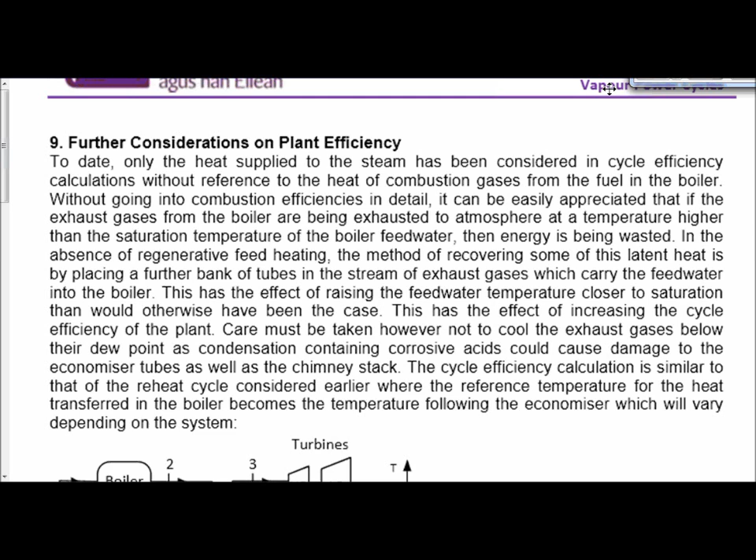And basically they're just a bank of tubes where the feed water leaving the feed pump is fed through before it's fed into the boiler, and they have the effect of raising the temperature of the feed water closer to saturation, so that less energy is needed in the boiler itself in raising the steam up to the required temperature for the turbine. So here is a diagram, both a plant diagram and a temperature enthalpy diagram of a system where an economizer is being used.

It's very similar, obviously, if you look at the diagram, to what we looked at in terms of the reheat cycle. The main difference is in considering the amount of heat that's being transferred into the working fluid in the boiler. Instead of using the enthalpy at exit from the feed pump, i.e. H3 minus H8, when evaluating the amount of heat that's been put into the working fluid up until the superheater, it now becomes H3 minus H9, which is the temperature of the feed water as it leaves the bank of economizer tubes. And that has the effect of increasing again slightly the thermal efficiency.

Looking at the TS diagram, the layout is almost identical to that of the reheat cycle we looked at in the last section, with the exception that point 9 now appears. Now, I haven't located it on the line, but it's going to be somewhere slightly below saturation point here. It really depends on the system. And so that is really the only difference between this and what we looked at before in the reheat cycle.

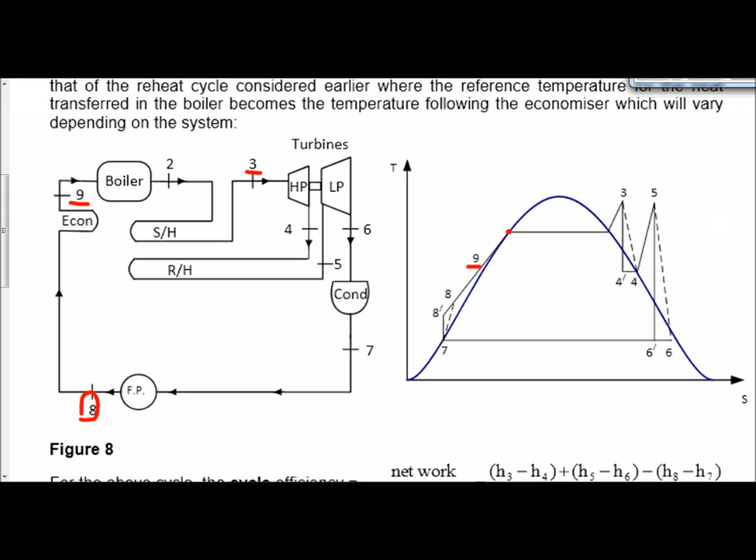So looking at the equation for the cycle efficiency, as before, it's the net work over the heat received, where the net work again is the work done by both stages of turbines, high pressure and low pressure. So we have H3 minus H4 plus H5 minus H6 minus the work input to the feed pump, which is H8 minus H7, and then the heat received is now going to be H3 minus H9, whereas before it would have been H8, plus the heat received in the reheater tubes, which is H5 minus H4. So there's our equation now for the cycle efficiency, where an economizer has been employed.

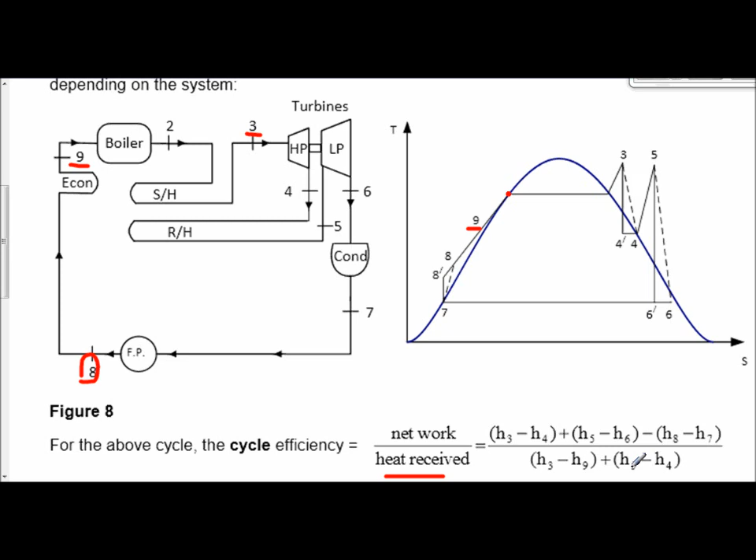I've also listed here on this page the equation for the actual plant efficiency. Now, cycle efficiency and plant efficiency are two different things. Cycle efficiency simply looks at the amount of heat energy that's been added to the working fluid, the proportion of that which has been converted into useful work output. The plant efficiency, however, looks at something slightly different. It looks at the proportion of the energy that's available in the fuel that has been converted into and translated into the working fluid.

And the way to evaluate the energy in the fuel is that equation there, where we have mass flow rate of fuel, so m dot f times CV, where CV is the calorific value of the fuel. So that times the mass flow rate of the fuel will give us the amount of energy that's available from the fuel being combusted in the boiler.

The net work, or in terms of power, because we've included mass flow rate on the bottom, then we need to do the same on the top, so it's going to be the mass flow rate of the steam times the enthalpy drops in both the superheat, up to the point at exit from the superheat section of the boiler, plus the heat received in the reheat section.

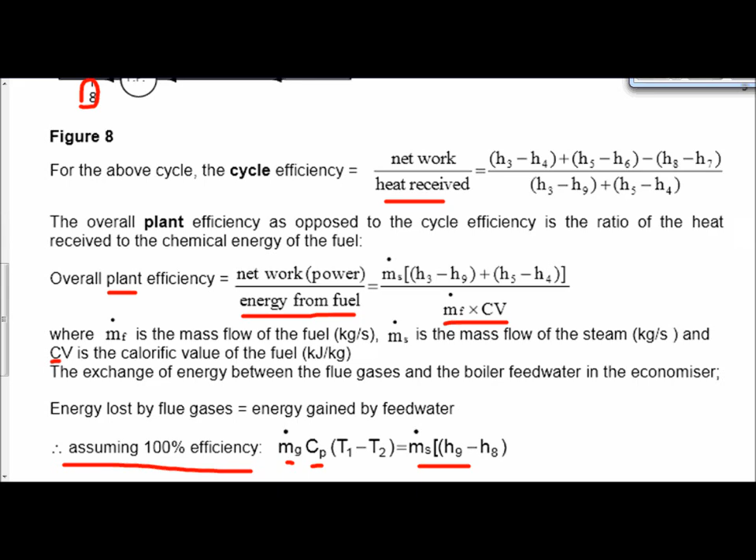And that's then equal to the mass flow rate of the steam times the enthalpy change across the economizer. So that gives us an expression of the energy transferred in the economizer. And at the top of the next page, it just reminds us of what the terms mean in our mc delta T equation.

So if you consider an example where an economizer is being employed to raise the temperature of the feed water, then example 3 on page 19 says a steam boiler supplies steam at 80 bar 500 degrees Celsius to a two-stage turbine. The steam is expanded first of all in the high pressure turbine to a pressure of 4 bar. It's then reheated to the original temperature of 500 degrees Celsius in a bank of reheater tubes. The steam is then expanded in our second stage in a low pressure turbine down to a condenser pressure of 0.035 bar. And we're given some specification of the system.

We have the isentropic efficiency of the two turbine stages. Now you'll notice they're different this time. High pressure turbine is 0.89 and the low pressure turbine is 0.92. The mass flow rate of the fuel is 4,300 kilograms per hour, and the calorific value of the fuel is 42.5 megajoules per kilogram. We're also given the mass flow rate of the steam, which is 50,000 kilograms per hour, and we're told that the feed water temperature at exit from the economizer, which is going to be T9, is 130 degrees Celsius.

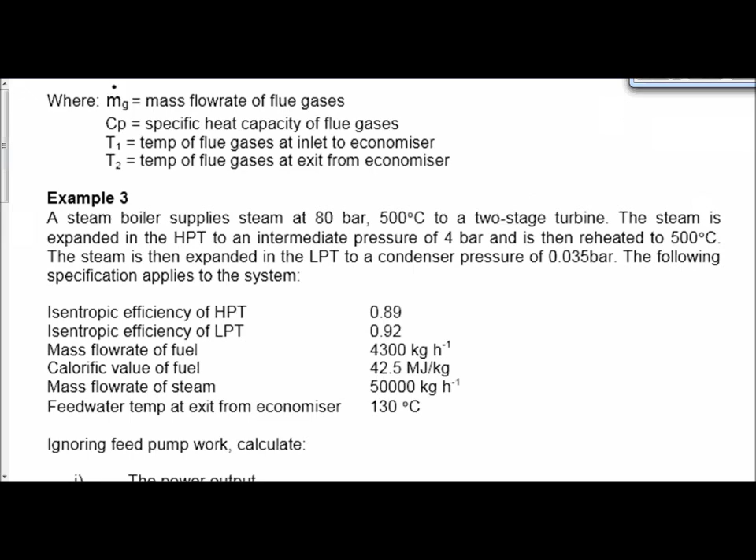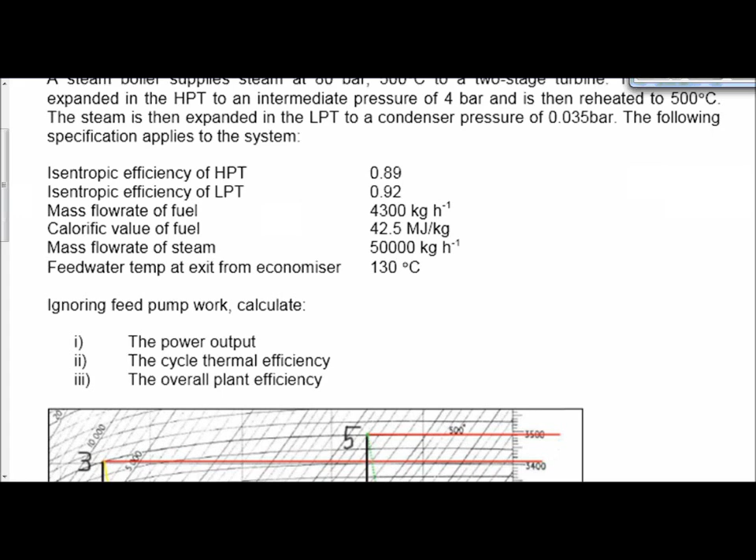So ignoring the feed pump work, then we're asked to calculate 1, the power output, 2, the cycle thermal efficiency, and 3, the overall plant efficiency. So going to our entropy chart, we can plot the expansion through both the high pressure and the low pressure turbines. So again, with reference to the diagram in figure 8, using the same number notation, then point 3 represents the input to the high pressure turbine.

If we draw our vertical line for isentropic expansion, we're told that the intermediate pressure was 4 bar. So first of all, point 3, we were told, was 80 bar and 500 degrees Celsius, which is equivalent to 8,000 kilonewtons per meter squared. So we have 5, 6, 7, 8, and we also have a temperature of 500 degrees. So when these two intersect, then this is our start point at entry to the high pressure turbine.

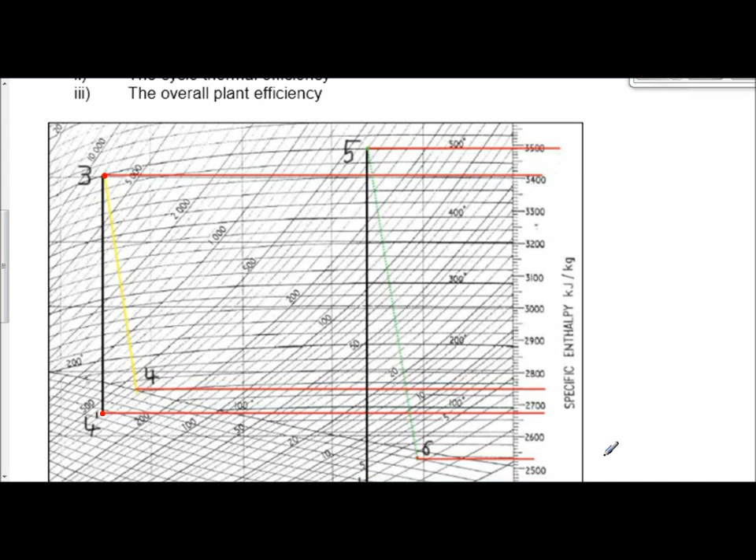So if we draw a vertical line until we hit our intermediate pressure of 4 bar, which again is equivalent to 400 on the chart here, then we get 4 dash. That is the ideal condition at exit from the high pressure turbine. Project across to our enthalpy scale, and we have H3 and H4 dash. If we then look at the expansion through the low pressure turbine, then we were told that at 4 bar the temperature was raised back up again to 500 degrees Celsius. So where these two lines intersect, 500 degrees and 4 bar, is our input to the low pressure turbine.

If we draw a vertical line down to the condenser pressure, which we're told was 0.035 bar, which is equivalent to 3.5 on our chart here, we now have the ideal condition at exit from the low pressure turbine. Again, project across from 5 and 6 dash. We're now in a position to be able to evaluate the actual enthalpy at exit from both the high pressure and the low pressure turbines by employing our equations for isentropic efficiency, like we did in previous examples.

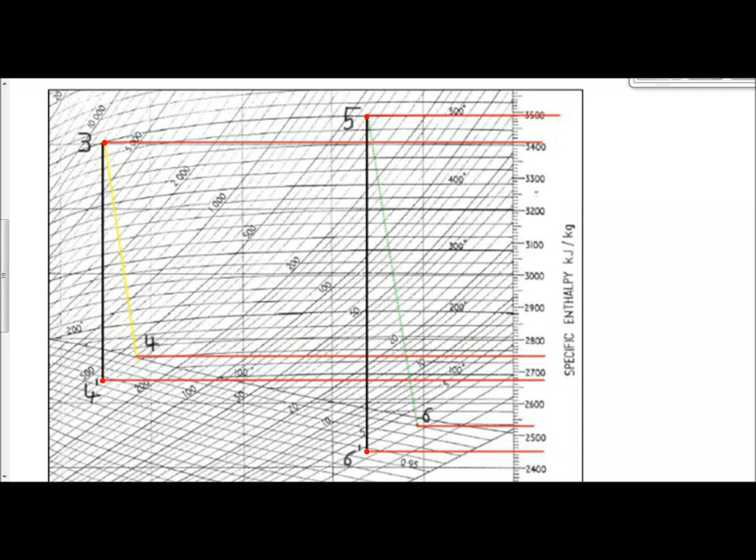So if we list our enthalpies then from the chart, and you'll notice just before that I've listed the enthalpy at exit from the economizer, because we were told that it was at a temperature of 130 degrees Celsius. So in order to evaluate that enthalpy at exit from the economizer, we just go to our steam tables and locate the temperature 130 degrees Celsius, and then we need to read off the HF value.

You'll notice that we don't consider the pressure because 0.9 is slightly to the left of the saturated liquid line. So at 130 degrees Celsius from the steam tables, you'll see that HF there is 546 kilojoules per kilogram from the saturated water and steam tables. If we read off our enthalpies from the chart, H3, H4 dash, H5 and H6 dash, then we get these enthalpies here. Of course, H3 and H5 could also have been read from the tables, and you can check that to make sure you're on the right lines in terms of the chart.

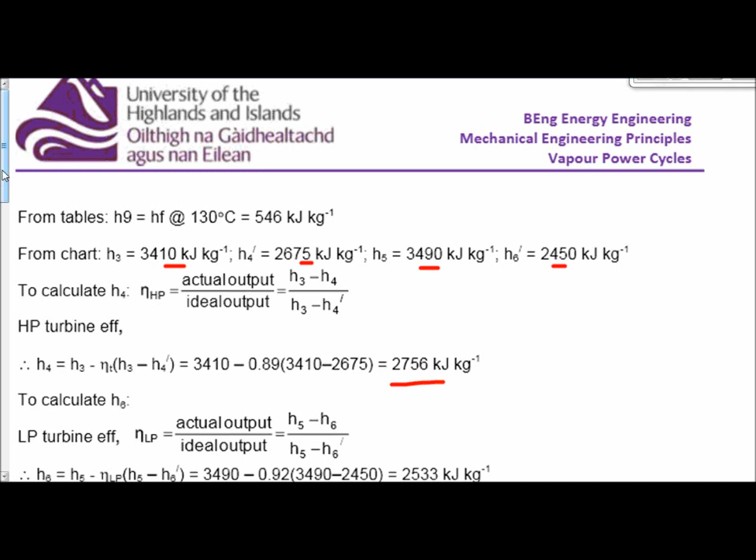But then to calculate the actual enthalpy at exit from the first expansion stage, we've got our equation for efficiency of the high pressure turbine, actual output over ideal, transpose that for actual, and we get 2756, similar to what we did before in the previous examples. If we then apply the same process to the low pressure turbine and transpose for the actual enthalpy at exit, H6, then we get 2533.

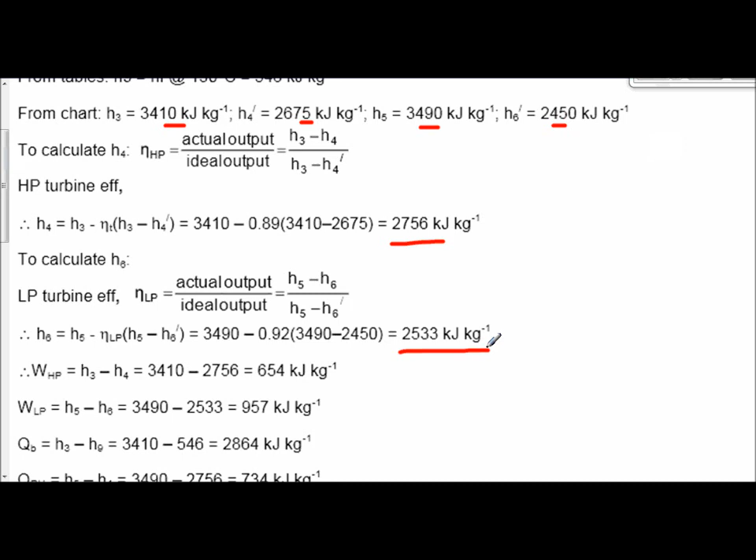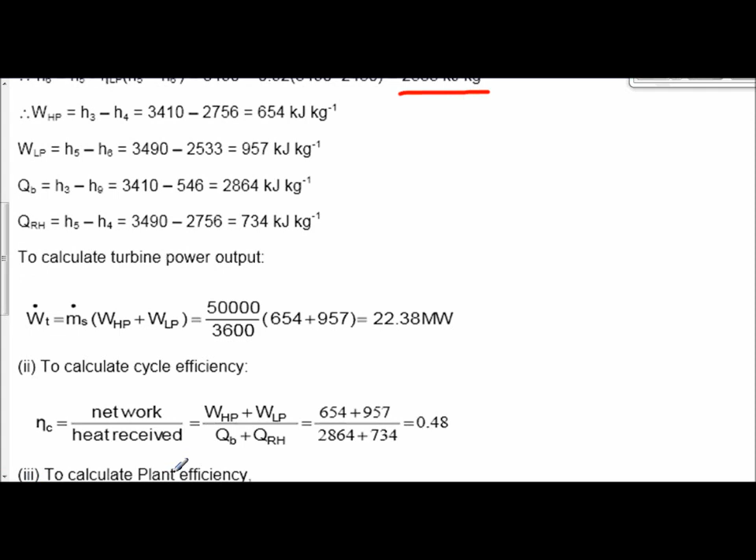Now the first calculation we need to perform is to find out what the cycle efficiency is, which is going to be the net work divided by the heat received. And here's the equation down here. As before, net work is the work output from the turbine minus the work input to the feed pump, and we were told in the question to ignore the work input to the feed pump. Therefore, we just have the work output from the turbine. So there it is, high pressure work plus low pressure, divided by the heat received, which is going to be the heat received in the boiler plus the heat received in the reheater tubes.

So coming back up here, we can calculate these four quantities separately. We've got the work done by the high pressure turbine, which is going to be H3 minus H4. In the low pressure turbine, it's H5 minus H6. The heat received in the boiler, and this is again where it's different to what we did before, is now H3 minus H9 as opposed to H3 minus H8, H9 being the enthalpy of the feed water leaving the economizer. And finally we have the heat transferred in the reheater tubes, H5 minus H4.

Before we calculate the cycle efficiency, the question did ask us to find out what the turbine power output is. Now, power P is the same as saying work rate, W dot, where the equation for power and work rate is equal to mass flow rate, and it'll be mass flow of the steam, times the change in enthalpy, so delta H.

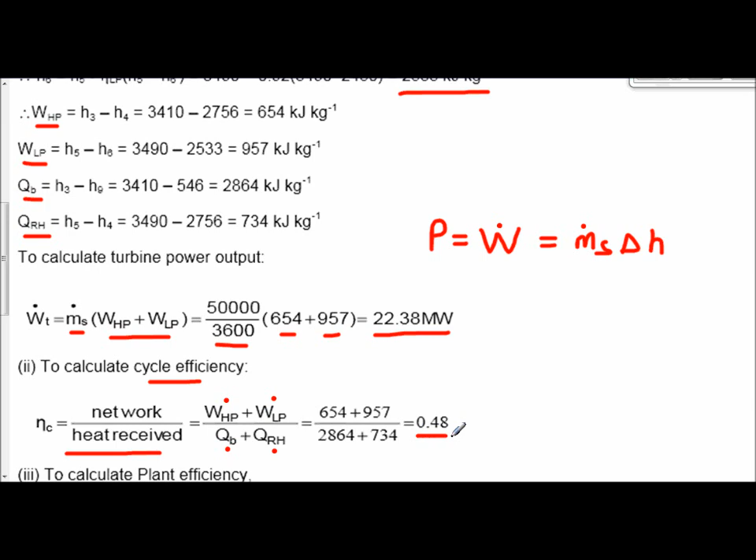So to work out the work output from the turbines, it's going to be the mass flow of the steam times the combined work outputs from both high pressure and low pressure turbines. We were told that the mass flow of the steam in the question was 50,000 kilograms per hour. Change that to seconds by dividing by 3,600. Then input our works for high pressure and low pressure turbines, and we get an answer of roughly 22.4 megawatts. Input the values for our cycle efficiency, net work, that is the work output ignoring the work input to the feed pump, divided by the heat received, and we get a cycle efficiency of 0.48 or 48%.

So finally, we're asked to calculate the plant efficiency, which we were told was the net work over the heat received by the fuel, or the power divided by the heat received by the fuel. So we're going to be using our 22.38 megawatts that we calculated in part 1. And then we're going to be using the mass flow rate of the fuel and the calorific value of the fuel to evaluate how much energy was available in the fuel. Just be careful of units here.

We were told that the mass flow rate of the fuel was 4,200 kilograms per hour. Actually, the mass flow rate of the fuel is 4,300, I think it said in the question. I've put 4,200 in the solution. You can change that to 4,200 in the question. And the calorific value was 42.5 megajoules per kilogram.

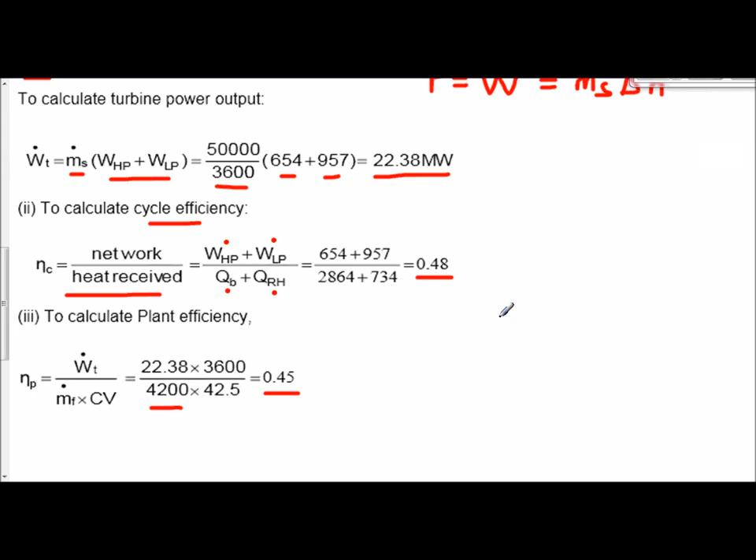Since our work is 22.38 megawatts and the calorific value is 42.5 megajoules, we can leave them as they are, because they're both in mega. The only other thing is, because our mass flow rate of the fuel is 4,200 kilograms per hour, we need to change our top line also to hours. Watts are joules per second. So to change that to joules per hour, or in this case megajoules per hour, multiply the top line by 3,600. You could of course have changed 4,200 to seconds by dividing by 3,600, but you'll get the same answer of 0.45 or 45%.